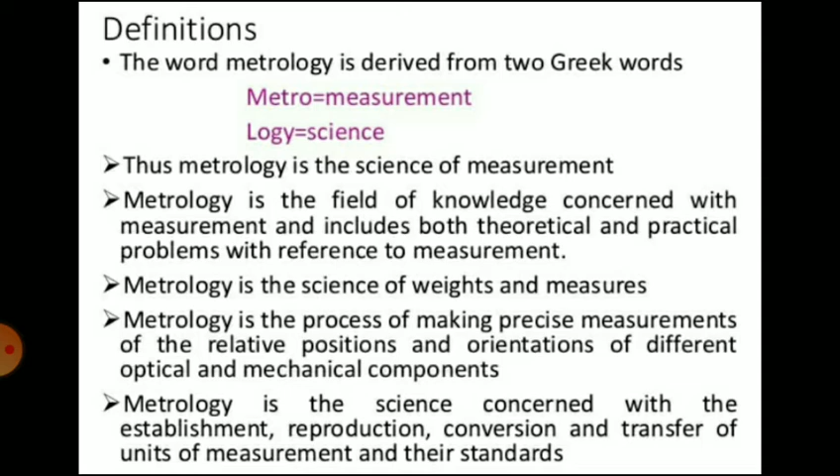Thus, metrology is not only limited to length and angle measurement but also concerned with numerous problems related with the measurement. In practical applications, it is the enforcement, verification, and validation of predefined standards.

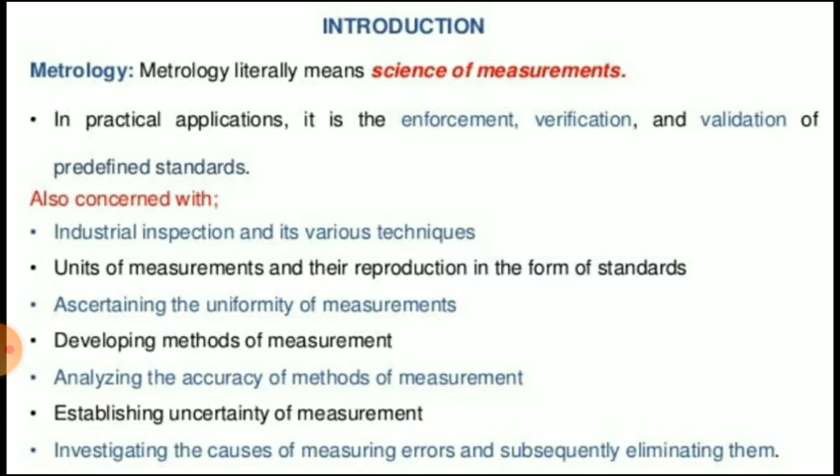So metrology is also concerned with the units of measurement and their standards, methods of measurement based on agreed units and standards, errors in measurement, measuring instruments and devices, accuracy of measuring instruments and their care, industrial inspection and its various techniques, and design, manufacturing, and testing of gauges of all kinds.

Then, need of inspection. So inspection means checking of all materials, products, or components at various stages during manufacturing. It is the act of comparing materials, products, or components with some established standard.

In old days, the production was on a small scale. Different parts were made and assembled by the same operator. If the parts did not fit properly at the time of assembly, he used to make the necessary adjustments in the mating parts.

Therefore, it was not necessary to make similar parts exactly alike as there was no need of inspection. Nowadays, the products are being manufactured on a large scale due to low cost methods of mass production. When a large number of identical parts are manufactured on the basis of interchangeability, if their dimensions are actually measured every time, lot of time will be required. To save this time, the gauges are used. Thus, the need of inspection arises to ensure that the part, material, or component conforms to the established standard.

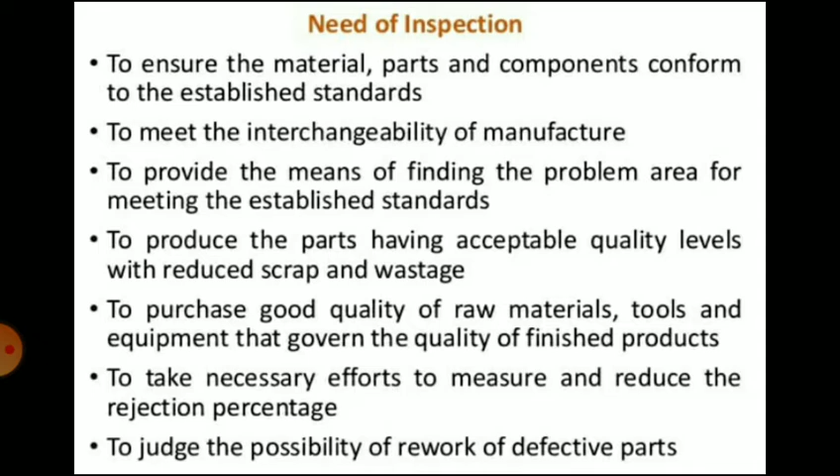It also helps to purchase good quality of raw materials, tools, equipment which governs the quality of finished product and to take decision on the defective parts, that is to judge the possibility of making some of these parts acceptable after minor repairs. So that is the need of inspection.

Then elements of metrology. So the first element is the standard. The most basic element of measurement is standard, without which no measurement is possible. So standard, it is a physical representation of unit of measurement. So different standards have been developed for various units, including fundamental units as well as derived units.

Then second element is workpiece. So workpiece is the object to be measured or measured part. So variations in geometry and surface finish of the measured part directly affect the measuring system's repeatability.

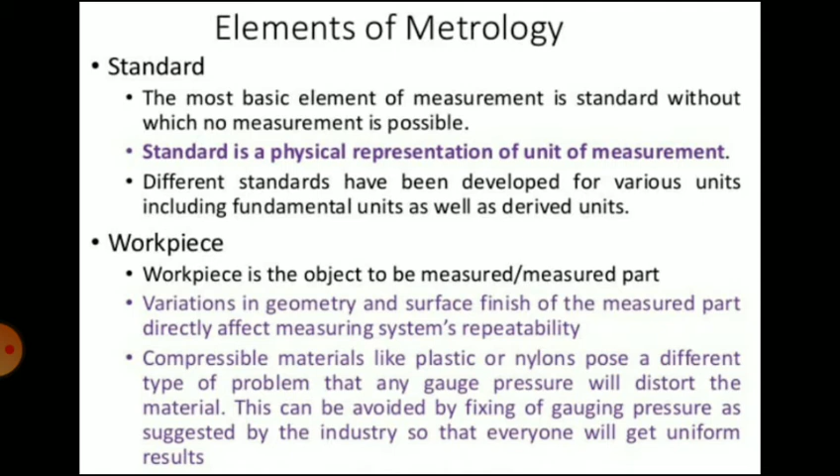Then third element, instruments. So instrument is a device with the help of which the measurement can be done. The instrument must be selected based on the tolerance of the parts to be measured, the type of environment, and the skill level of operators. It should be remembered what type of instruments the customer prefers to measure.

Next element is person. There must be some person or mechanism to carry out the measurement. So modern gauges are increasingly easy to use, but the failure to adequately train the operating personnel will lead to poor performance.

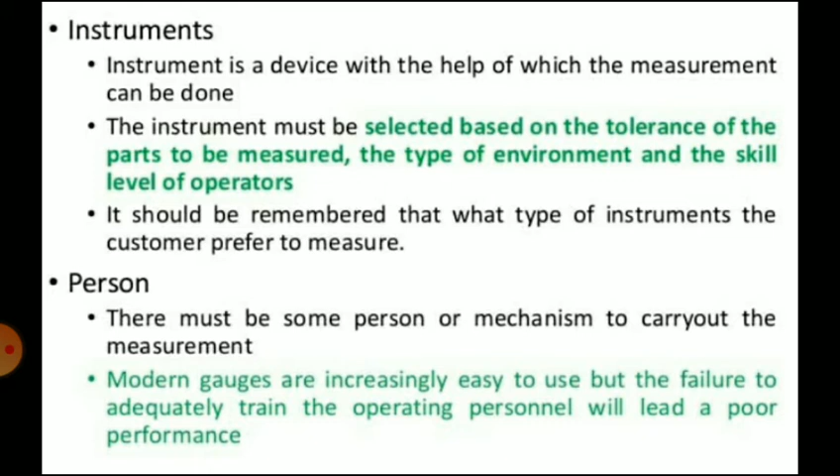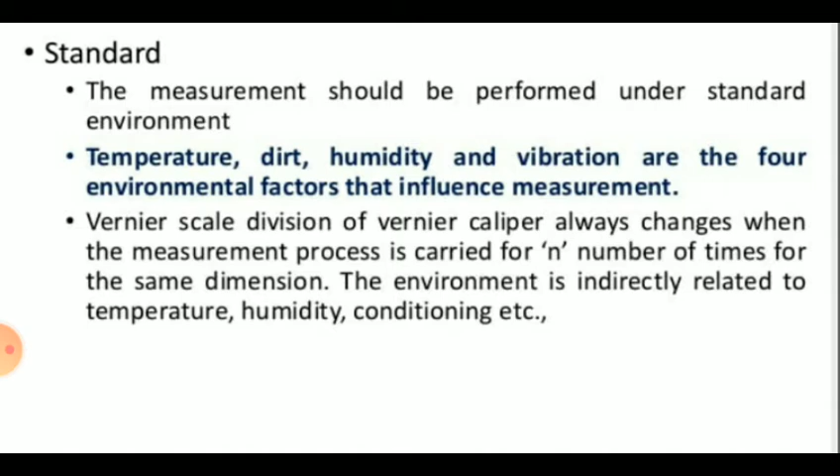Then standard. The measurement should be performed under standard environment. So the temperature, dirt, humidity, and vibration are the four environmental factors that influence measurement. So vernier scale division of the vernier caliper always changes when the measurement process is carried for n number of times for the same dimension. The environment is indirectly related to temperature, humidity, conditioning, etc.

Then methods of measurement. In precision measurement, various methods of measurement are adopted depending upon the accuracy required and the amount of permissible error.

So the methods of measurement can be classified as, first is direct method. In this, the value of the quantity to be measured is directly obtained without any calculations, or the quantity to be measured is directly compared with the primary or secondary standard. So this method is widely employed in production field.

Examples include measurement using scales, vernier calipers, micrometers, etc. This method is not very accurate because it depends on human insensitiveness in making judgment. So in a direct method, the value of the quantity to be measured is obtained directly without any calculations.

Then the next method is the indirect method. In this, the value of the quantity to be measured is obtained by measuring other quantities which are functionally related to the required value. Examples are angle measurement by sine bar.

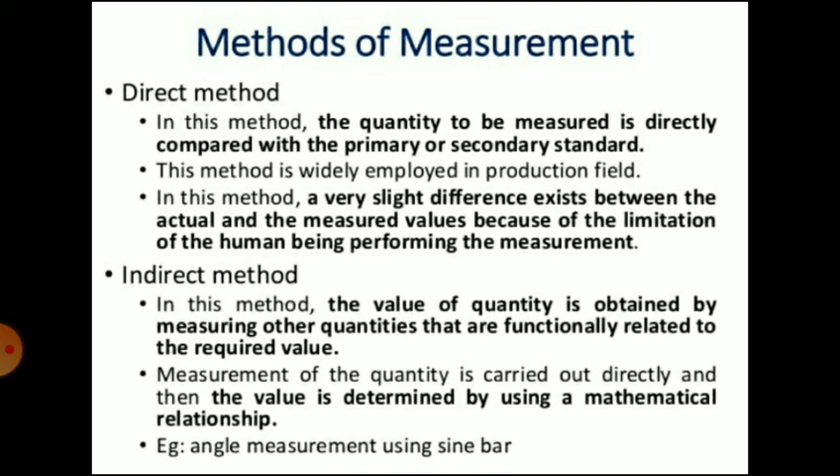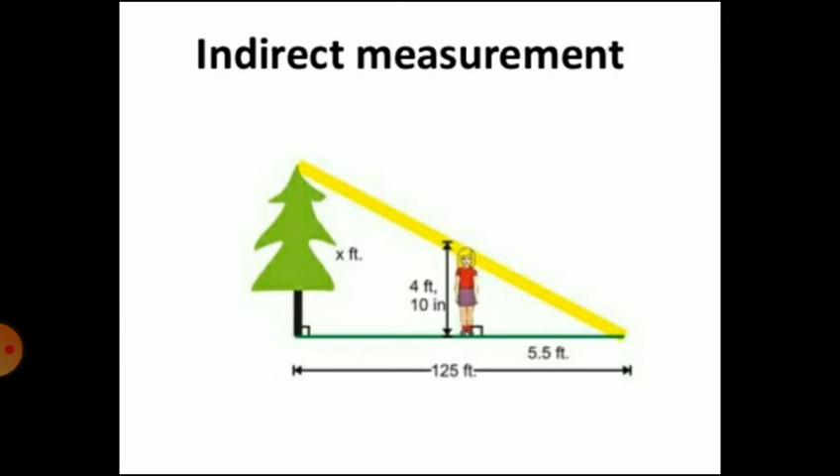Then absolute or fundamental methods. In this method, the measurement is based on the measurements of base quantities used to define the quantity. For example, clearances between components by feeler gauges. So the quantity under consideration is directly measured and is then linked with the definition of that quantity.

Then the comparative method. In this, the value of the quantity to be measured is compared with a known value of the same quantity or other quantity practically related to it. So in this method, only the deviations from the master gauge are determined. Examples of comparative methods are dial indicators and other comparators.

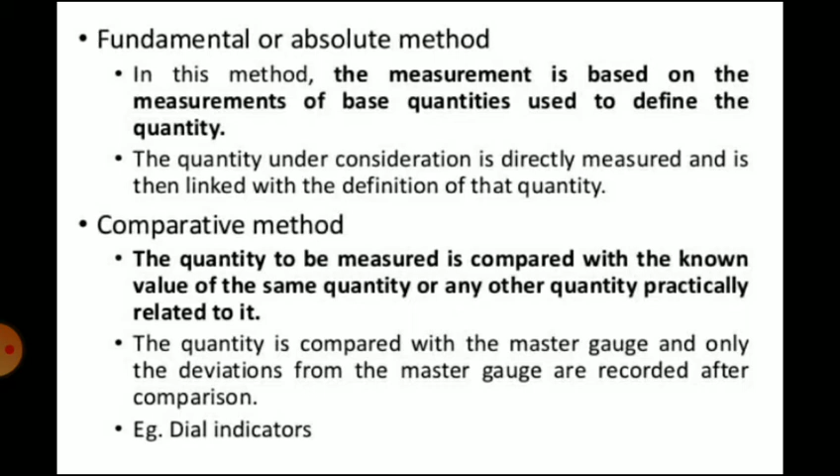Then the transposition method. This method involves making the measurement by direct comparison wherein the quantity to be measured is initially balanced by the known value of the same quantity.

Then the coincidence method. In this, a very small difference between the value of the quantity to be measured and the reference is determined by observation of the coincidence of certain lines or signals. Examples are measurement by vernier caliper and micrometer. That is the coincidence method.

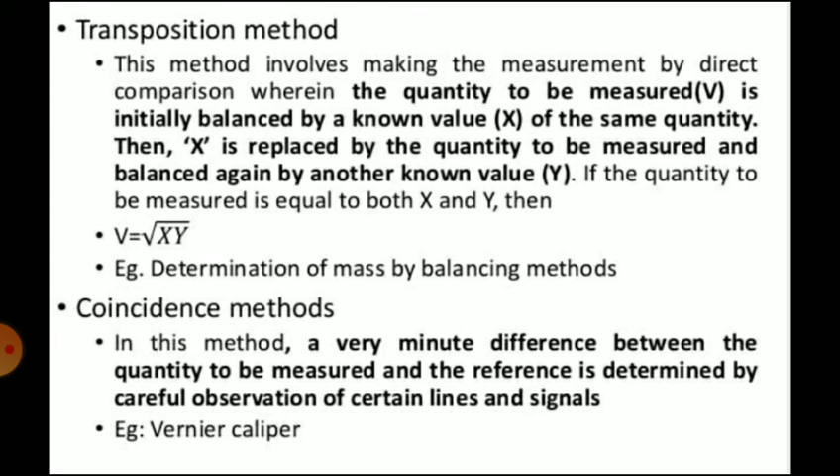Then the deflection method. In this, the value of the quantity to be measured is directly indicated by a deflection of a pointer on a calibrated scale. For example, pressure gauge. Then the null measurement method.

In this method, the difference between the value of the quantity to be measured and the known value of the same quantity with which comparison is to be made is brought to zero. That is the null measurement method.

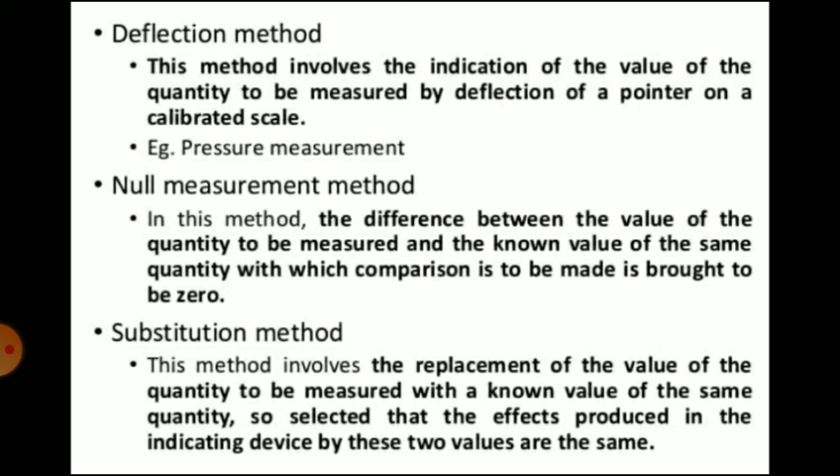Then the substitution method. This method involves the replacement of the value of the quantity to be measured with a known value of the same quantity, so selected that the effects produced in the indicating device by these two values are the same. So this is a deflection measurement.

So in the deflection method, the value of the quantity to be measured is directly indicated by the deflection of a pointer on a calibrated scale. You can see there is a pointer and the calibrated scale so that you can see the value.

Then the null method measurement. Then the contact method. In this method, the sensor or measuring tip of the instrument actually touches the surface to be measured. For example, dial indicators, micrometer, vernier caliper.

Then the contactless method. In this, there is no direct contact with the surface to be measured. For example, measurement by optical instruments, toolmaker's microscope, profile projector. So there is no direct contact of the instruments with the surface to be measured.

Then the composite method. The actual contour of a component to be checked is compared with its maximum and minimum tolerance limit. That is the composite method.

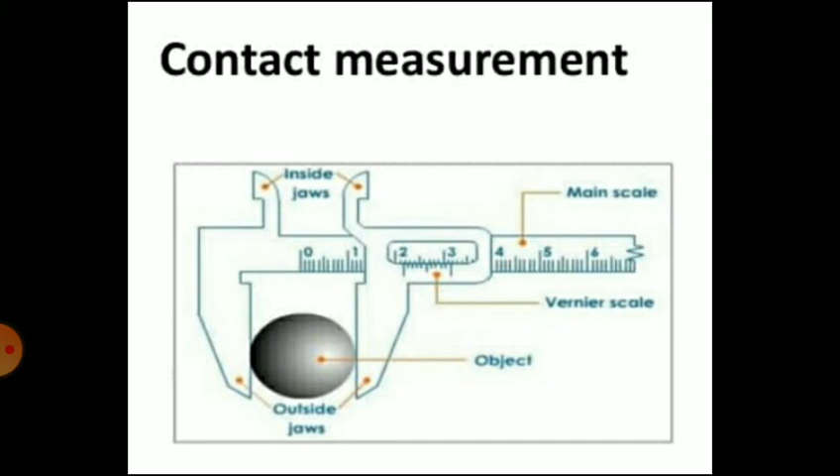So this is contact measurement, where there is contact between the surface to be measured and the instrument. This is measurement by vernier caliper. Then contactless measurement, where there is no actual contact between the surface to be measured and the instrument.

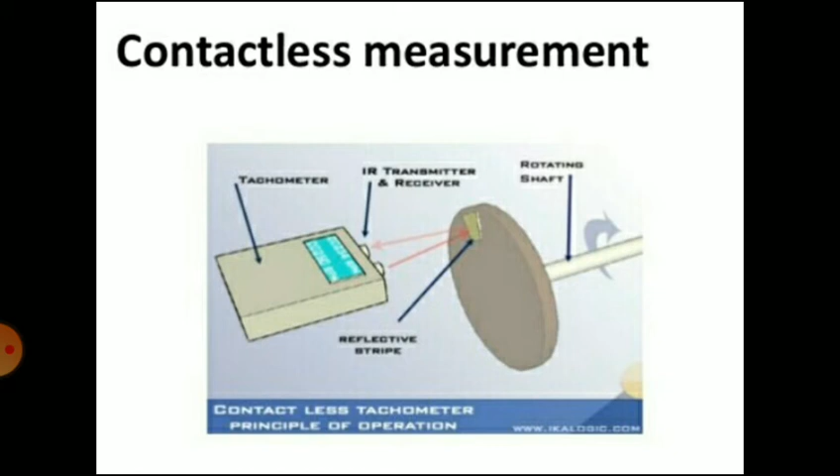Then the basic concepts of measurements. The sequence of operations necessary for the execution of measurement is called the process of measurement. There are three important elements of measurement. The first is the measurand.

It is the physical quantity or property like length, angle, diameter, thickness, etc. to be measured. That is called the measurand, the physical quantity that is to be measured.

Then the reference, it is the physical quantity or property to which quantitative comparisons are made, that is called a reference. Then the third element is the comparator. It is the means of comparing the measurand with some reference, an instrument used for that comparison.

For example, to measure the length of an MS flat, the length of the MS flat is the measurand, that is the quantity to be measured. Then the steel rule is the reference, and the eye is considered as the comparator.

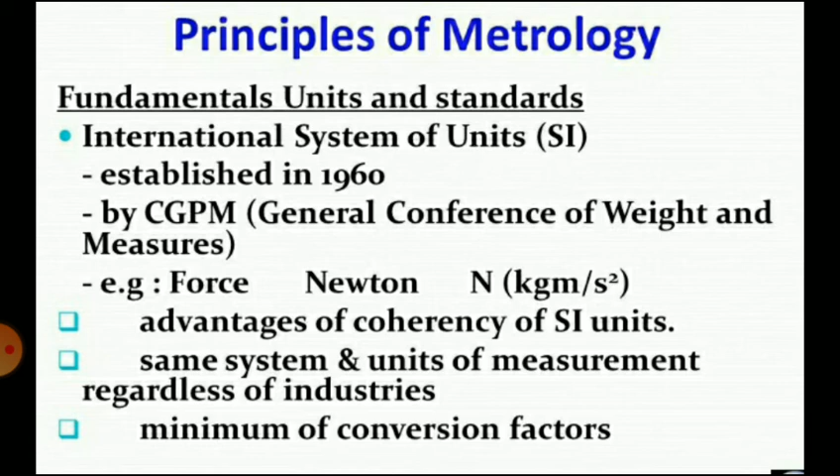For example, force is measured in Newton, indicated by N. SI units have advantages: coherency, same system and unit of measurement regardless of industries, and minimum of conversion factors.

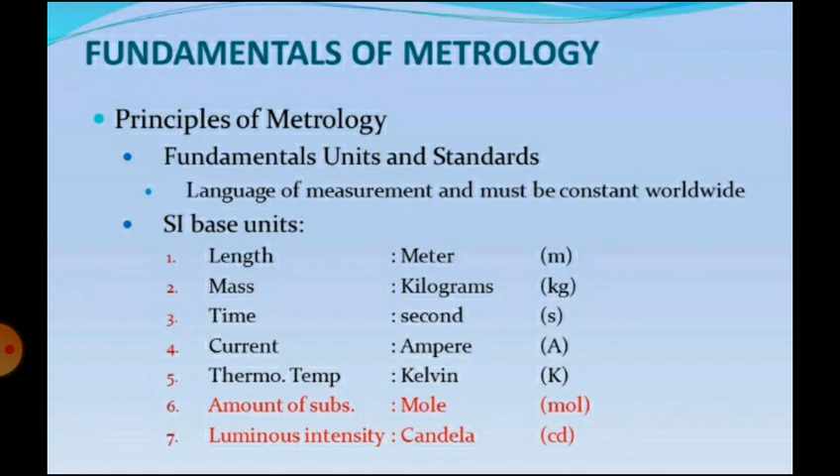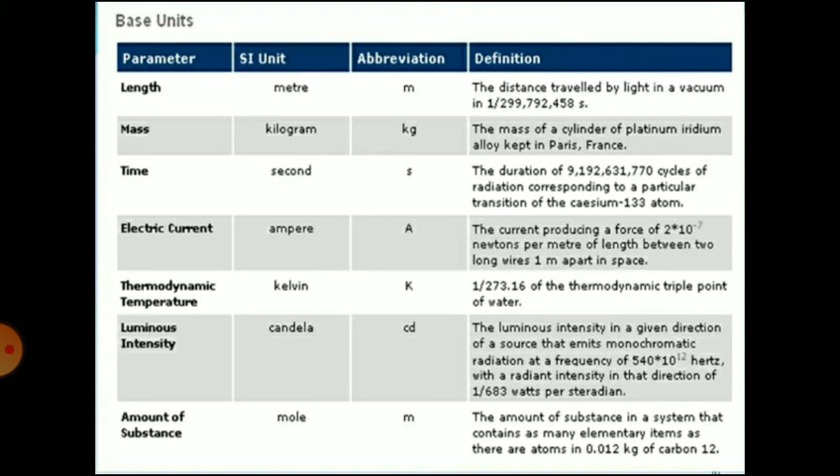Some SI base units are shown: length, mass, time, current, temperature, etc., with their corresponding units. This is a table for base units, having parameter, SI unit, abbreviation and definition for each. The length, mass, time, electric current, thermodynamic temperature, luminous intensity, and amount of substance are shown with their SI units and abbreviations.

Next, terminologies used in measuring instruments. First is accuracy: the degree to which the measured value of the quality characteristics agrees with the true value. Accuracy is the degree of agreement of the measured dimension with its true magnitude. The maximum amount by which the result differs from the true value is called accuracy, and it is expressed as a percentage.

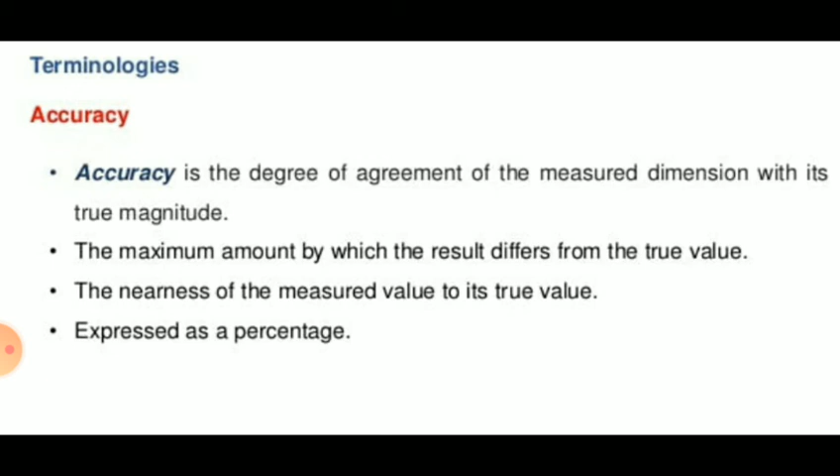Then precision. Precision is the repeatability of the measuring process. It refers to a group of measurements for the same characteristics taken under identical conditions. So precision means repeatability of the measuring process.

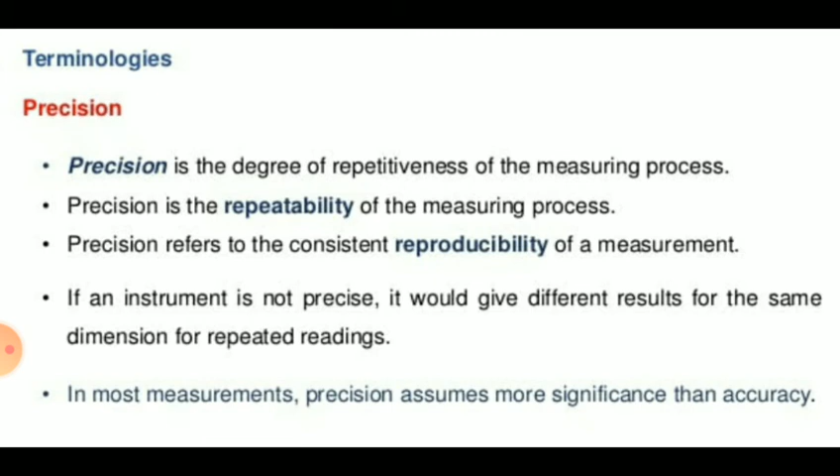You can see the difference between precision and accuracy using circle diagrams. In diagram A, the black spots are grouped outside the circle. So you can say it is precise but not accurate. Accurate means it is the degree to which the measured value of the quality characteristics agrees with the true value. Though it is outside the circle and not accurate, it is precise because there is grouping of the black spots, like gunshots.

In diagram B, all the spots are under the circle, meaning it is accurate, but it is not precise because there is no grouping of the black spots. Since precision is the repeatability of the measuring process, with no grouping and all spots scattered, that measurement is not precise but it is accurate because it is within the circle.

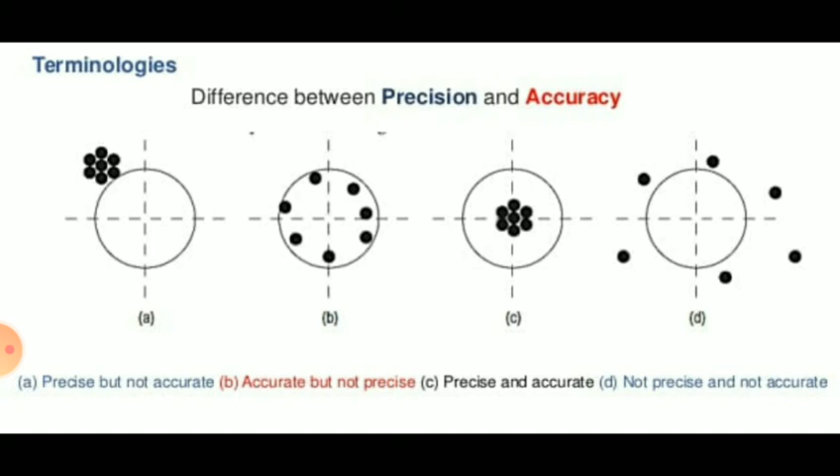In the last diagram, D, all the shots are outside the circle, meaning it is not accurate, and there is no grouping, as all the shots are scattering outside the circle, meaning it is also not precise. So it is not precise and not accurate.

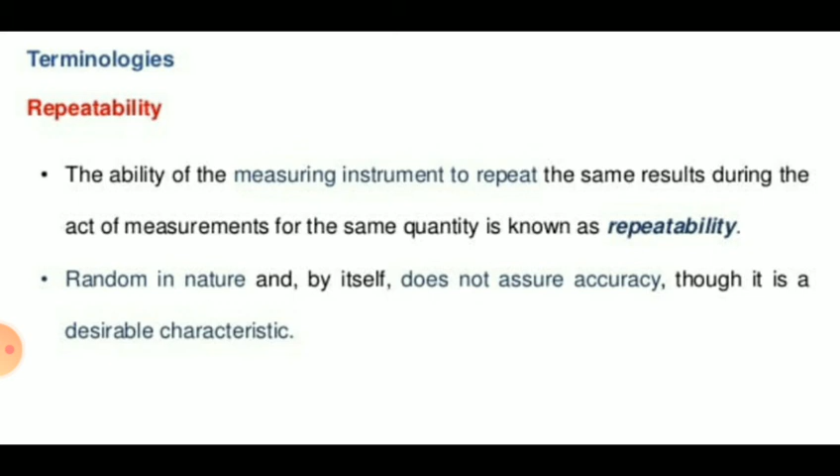Then repeatability: it is the ability of the measuring instrument to repeat the same results for the measurements of the same quantity. That is called repeatability.

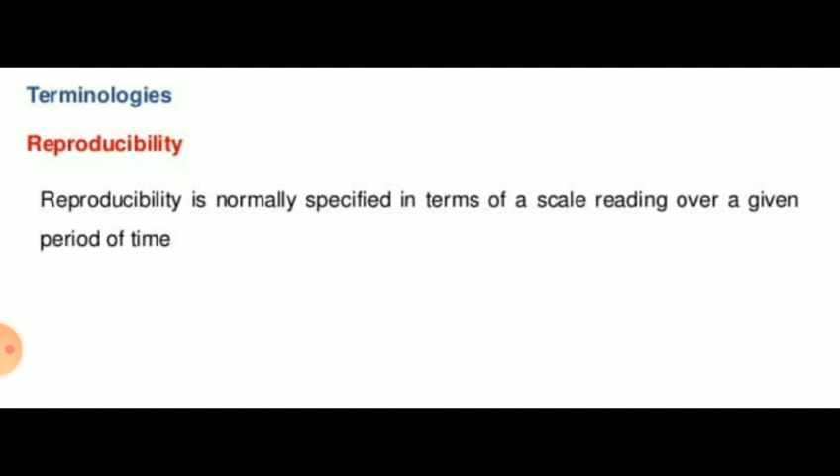Then reproducibility: it is the consistency of pattern of variation in measurement, that is closeness of agreement between the results of measurements of the same quantity. That is called reproducibility.

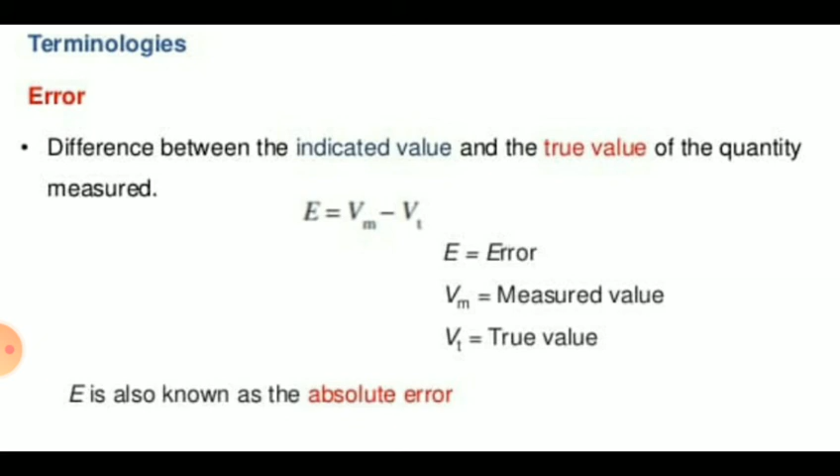Then error: it is the difference between the indicated value and the true value of the quantity measured. So it is an absolute error.

Then factors affecting accuracy: two terms are associated with accuracy in measuring equipment, sensitivity and consistency. Sensitivity is defined as the rate of displacement of the indicating device of an instrument with respect to the measured quantity, so it is the ratio of scale spacing to scale division value. It is the ability of the measuring equipment to detect small variation in a quantity being measured, that is called sensitivity.

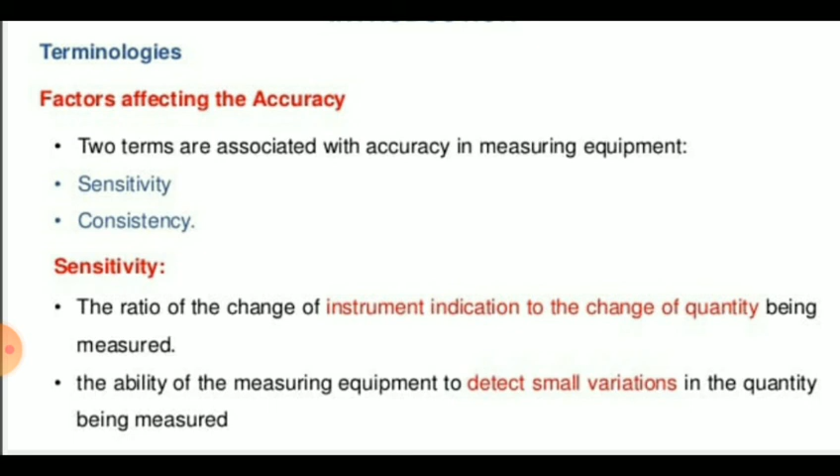Then consistency: if the successive readings of the measured quantity obtained from the measuring instrument are the same all the time, the equipment is said to be consistent. That is called consistency.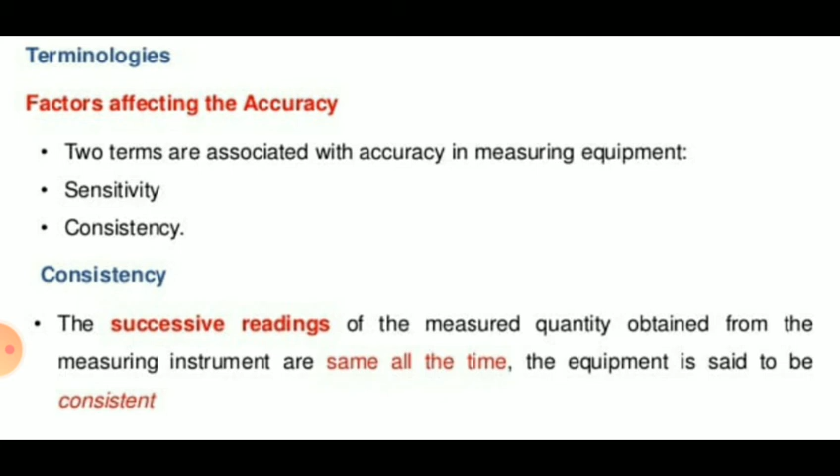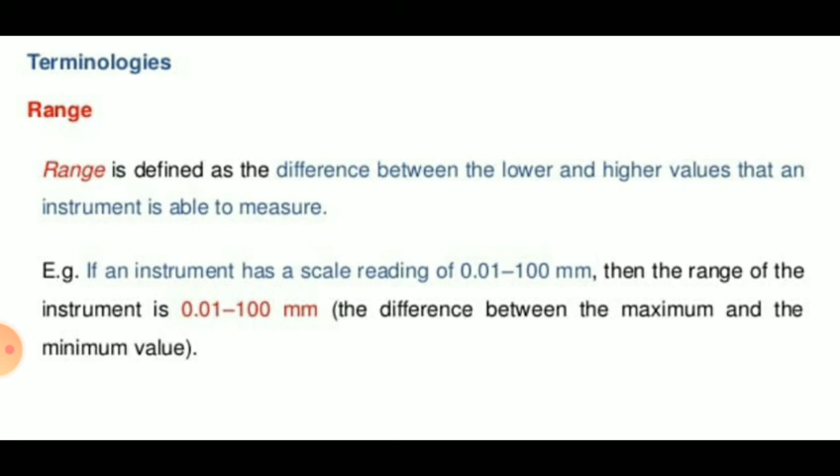Then readability: it refers to the ease with which the readings of the measuring instrument can be read. That is called readability. Then calibration: the calibration of the measuring instrument is necessary to measure the quantity in terms of standard units. Then range: range is defined as the difference between the lower and higher values that an instrument is able to measure.

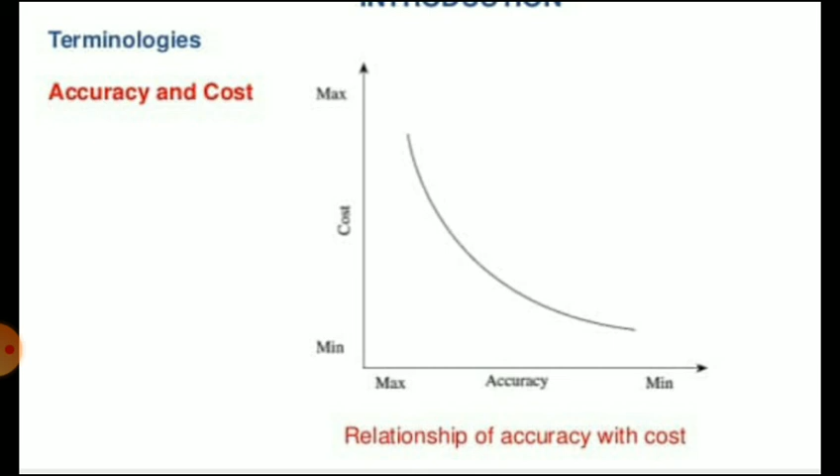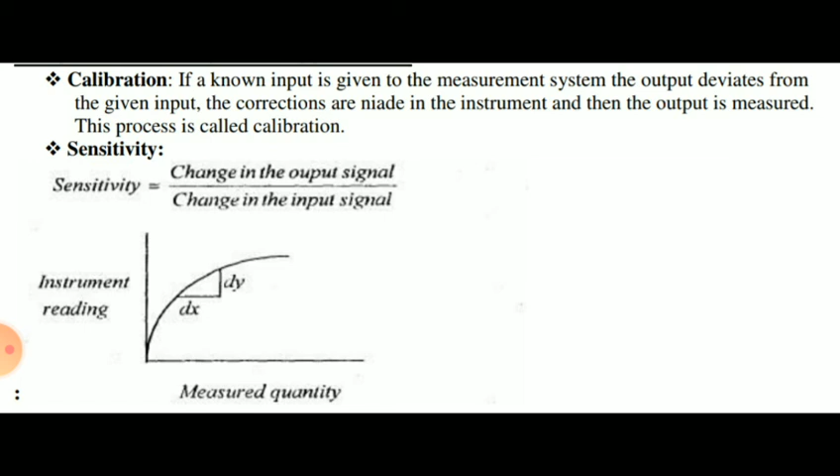This shows the relationship between accuracy and cost. Calibration of any measuring instrument is necessary to measure the quantity in terms of standard units. And sensitivity is the change in the output signal upon change in the input signal, that is called sensitivity.

So this is regarding introduction to metrology. Thank you.